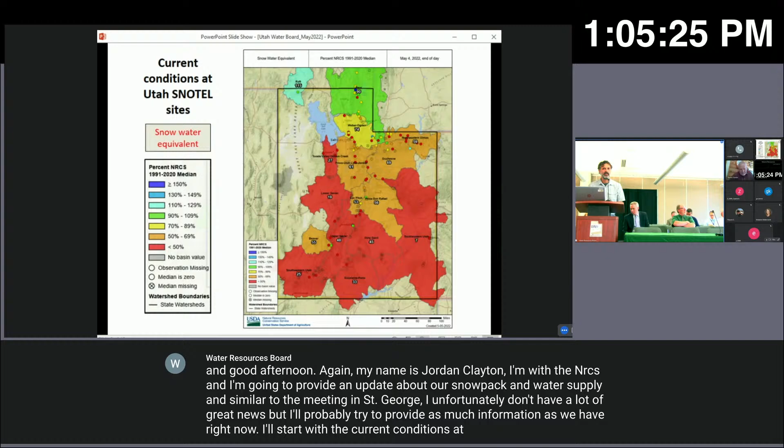I'll start with the current conditions at our SNOTEL sites, our snowpack measurement sites across the state. You can see those shown on this map by the small circles throughout the state. They're colored by what percent of normal they are right now. This was taken this morning. You can also see the major basins across the state and what percent of normal those basins are. With the exception of the Bear Basin in the northern portion of the state, the majority of the state is below normal for this time of year from a snowpack perspective.

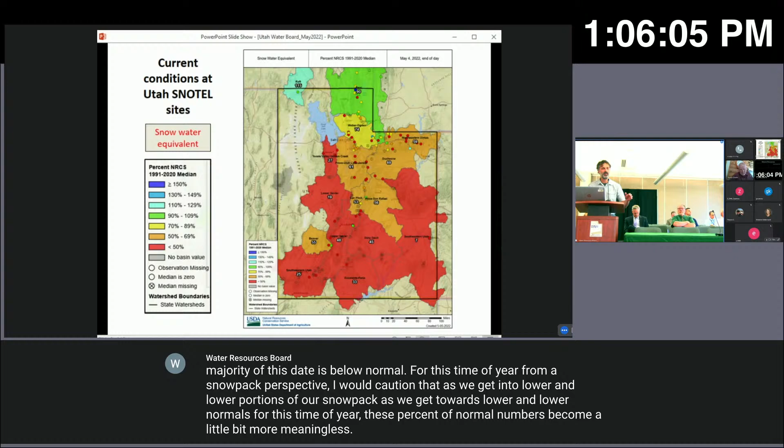I would caution that as we get into lower portions of our snowpack, closer to lower normals for this time of year, these percent of normal numbers become a little more meaningless. When we're comparing against a normal that's close to 1 or 2 inches, the percentages tend to blow up in either direction. So they're not quite as meaningful as a few weeks ago, but I still think they're instructive, so I wanted to include them for today's presentation.

It's trended well below that line since about the second week of January, or late January. Unfortunately, the excellent precipitation we received in October and December, which did boost our precipitation totals, did not lead to the snowpack totals we were hoping for this year, because the precipitation really turned off during January and February.

We've done okay during March and April, a little bit below normal depending on which basin you look at. Some areas, particularly northern Utah, have done a little better — the Bear and the Weber are above normal for April. But from a statewide perspective, we're still unfortunately below normal for our SWE.

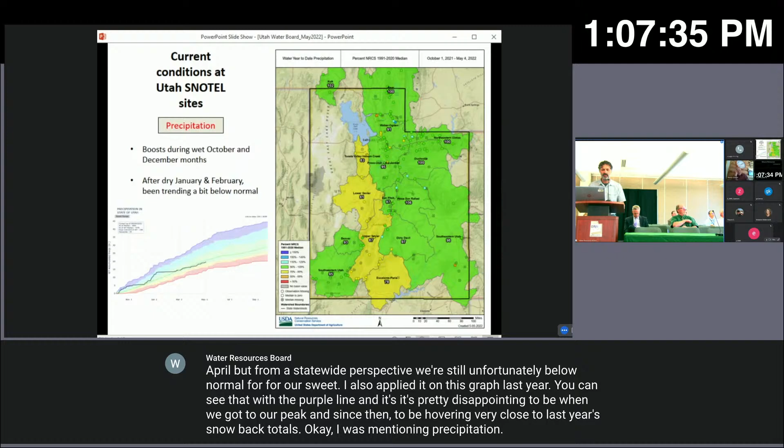Okay, I was mentioning precipitation. These are the major basins again, also shown with the SNOTEL sites, same coloring scheme — a lot more green on this map. We're close to normal for precipitation across the state, with the exception of the southern Wasatch Front and portions of the southern spine of mountains and the westward facing portions of those. But the predominant pattern here is close to normal for the annual water year.

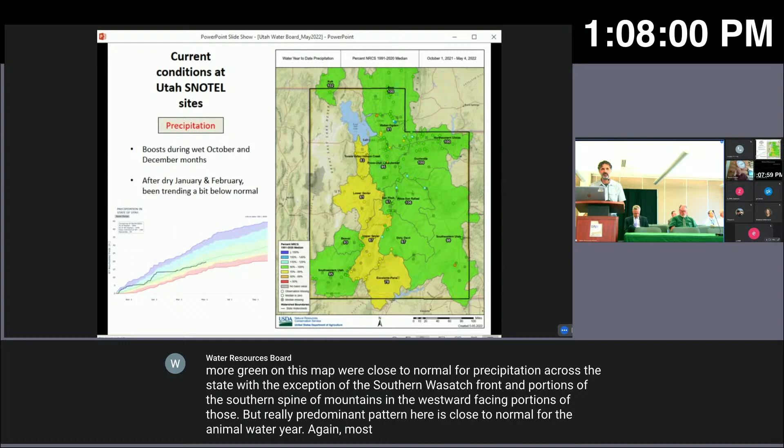Again, most of that comes from the huge boost we had during October and December. We've done pretty well, as I mentioned, in northern Utah over the last month and a half, and that's how the Bear got back up to 100%. But by and large, we're trending a little below normal, as you can see from the graph in the bottom left, showing the current water year.

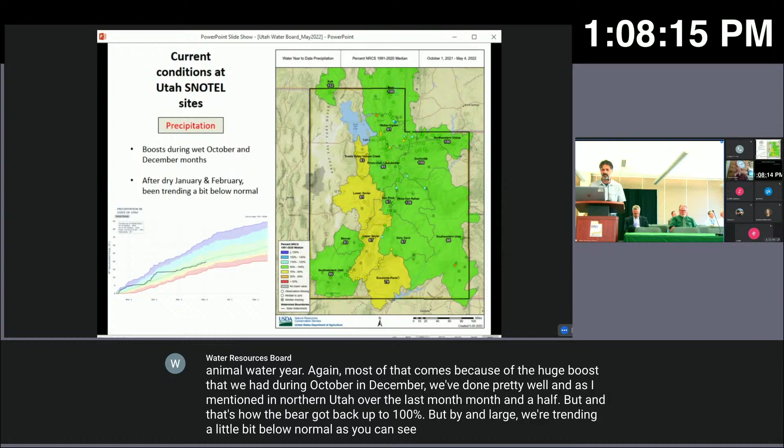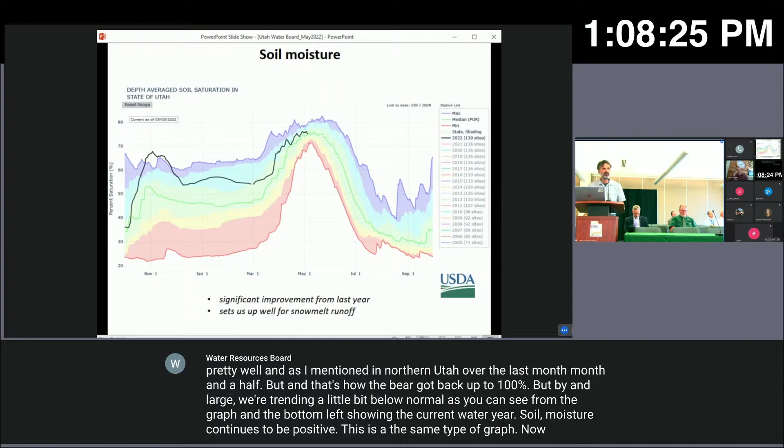Soil moisture continues to be positive. This is the same type of graph, now showing the current water year for soil moisture across the state. This is a depth-averaged value, so it looks at our 2-inch sensor, our 8-inch sensor, and our 20-inch sensor down. It just looks at mountain locations, not our SCAN sites — so this is just our SNOTEL sites.

We're still right about normal, just a little above normal depending on which basin you look at. Some have trended a little below by now, but that's okay — we're feeling pretty good about the soil moisture levels in the mountains, and that's going to promote a better efficiency of our runoff than we experienced last spring.

Last spring, we lost a really large percentage of our snow water to headwater locations, replenishing that sponge, if you will. We're expecting a better return on our snowpack investment this year.

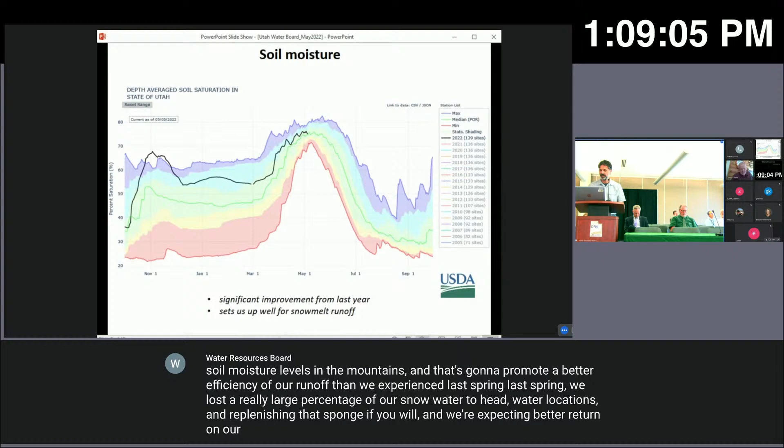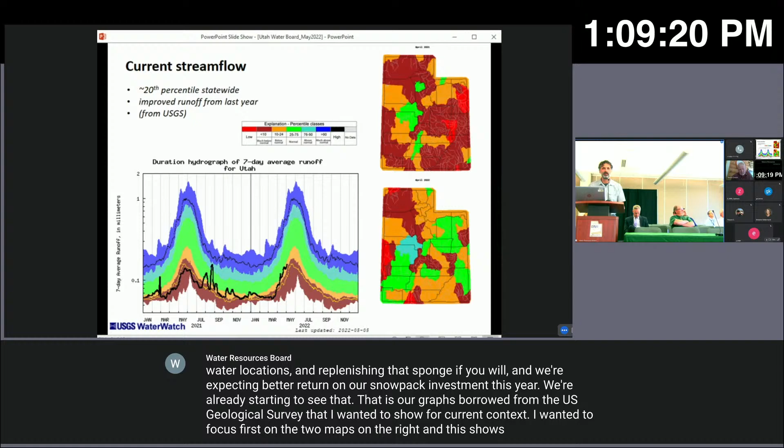We're already starting to see that. These are graphs borrowed from the U.S. Geological Survey that I wanted to show for current context. I wanted to focus first on the two maps on the right. This shows the monthly total stream flow for the basins in Utah for last year on the top right and this year on the bottom right. You can see the improvement across many portions of the state from a stream flow perspective.

We've definitely felt the impacts of that better soil moisture. Even for around the same amount of snowpack, we're seeing it show up in our streams more than we did last year. So I think that's pretty instructive.

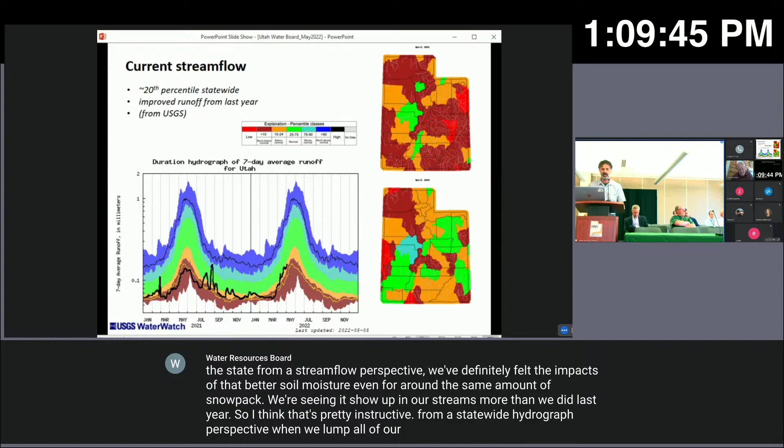From a statewide hydrograph perspective, when we lump all our streams together, that's what we get in the bottom left there. Again, the current water year is shown with the black line, and you can see we're starting to trend into around the 20th percentile. We're still below normal, but not as dire as we were last year at this time. If you move your eye to the left portion of that graph, you can see last year, at the beginning of May, we were solidly in the bottom 10th percentile.

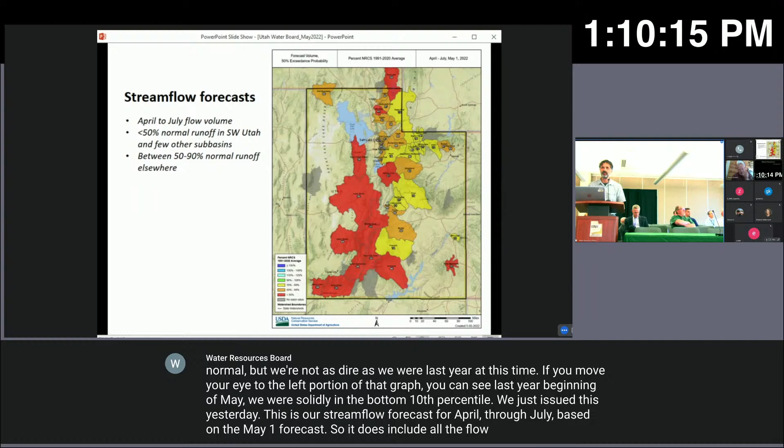We just issued this yesterday. This is our Streamflow forecast for April through July based on the May 1 forecast. It includes all the flow we've already received for the month of April, and it forecasts forward the total volume we'll receive from the beginning of April to the end of July as a volume.

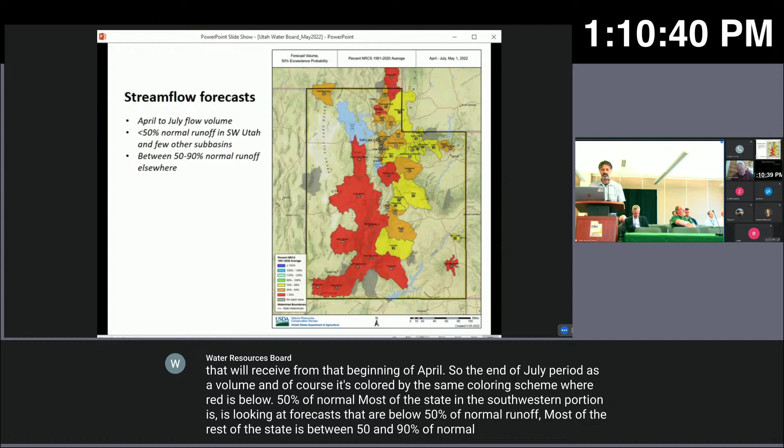It's colored by the same coloring scheme where red is below 50% of normal. Most of the state in the southwestern portion is looking at forecasts below 50% of normal runoff. Most of the rest of the state is between 50 and 90% of normal runoff anticipated at this point. I'd mention our partners at the Colorado Basin River Forecast Center have a similar forecasting regime, and their predictions are pretty close to these.

I don't want to speak for that agency per se, but I do want to mention that we reach out to the CBRFC when we are working on these forecasts, and it sounds like there's pretty good alignment between that agency and ours for this month.

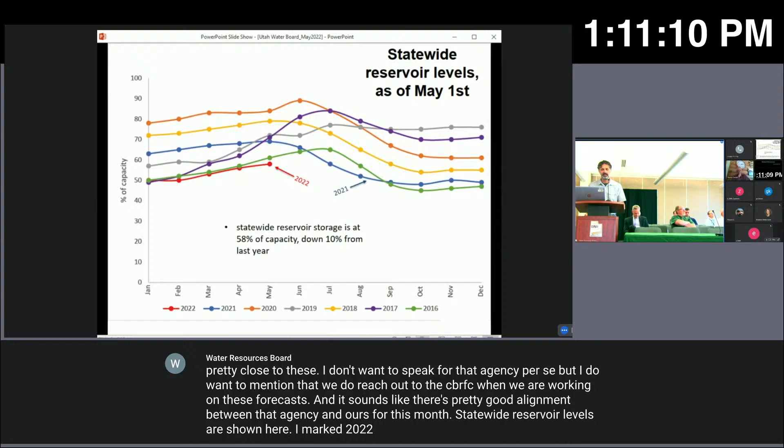Statewide reservoir levels are shown here. I marked 2022 with the red line - I just plotted this before coming over. We've got 58% of capacity right now in our reservoir system, that's down 10% from this time last year.

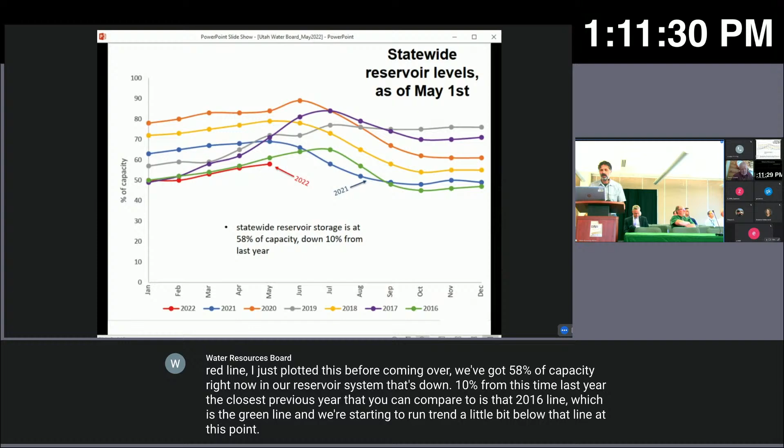The closest previous year we can compare to is that 2016 line, the green line, and we're starting to trend a little bit below that line at this point. But by comparison, that's the closest one we can think of from a management perspective. 2021 is shown by the blue line - you can see we're well below where we were last year from a reservoir perspective.

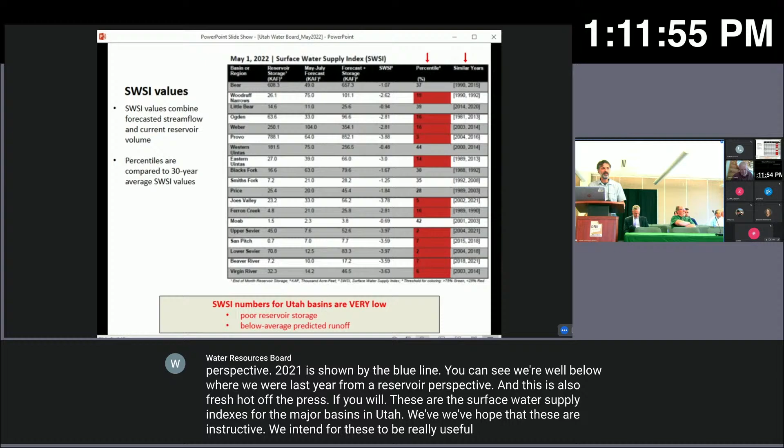This is also fresh, hot off the press. These are the surface water supply indexes for the major basins in Utah. We hope these are instructive. We intend for these to be a really useful measure of how much water is going to be available for those summer months. This combines the volume of water we're anticipating for those major basins with what's currently in those reservoir systems, and then we compare it to the previous 30 to 40 years for those basins to get an index.

Where the index is in the bottom 20th percentile, it shows as red. You can see there's a really large number of basins in the state that are in the red category - several are very, very low. The Provo and the upper Sevier are both at the second percentile. Also Joe's Valley, and several others in the state are very low at this point - upper Sevier and lower Sevier, I should mention.

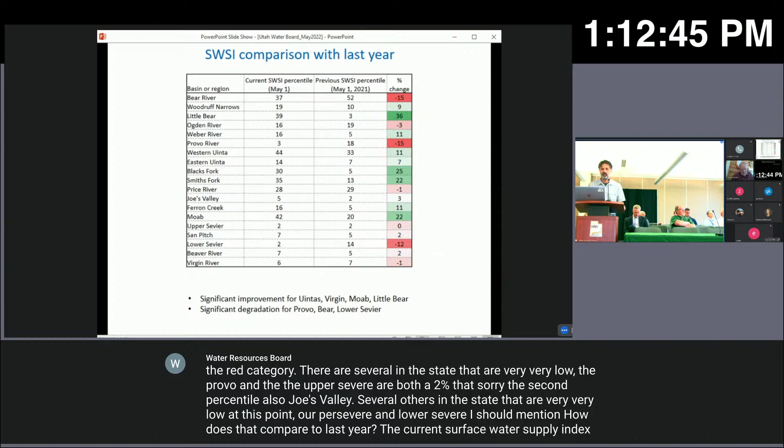How does that compare to last year? The current surface water supply index percentiles are shown on the left side of this chart. For May 1st last year, the SWSIs are shown on the right side, and the relative change is the final column. Areas of the state that were improving - we've seen some improvement - are the Uintas, the Virgin, Moab area, and the Little Bear, which have all significantly improved from last year, and that's positive.

I like to try to highlight anything positive that I can say at this point. Unfortunately, the Bear, the Provo, and the lower Sevier are significantly degraded from last year from a surface water supply index perspective.

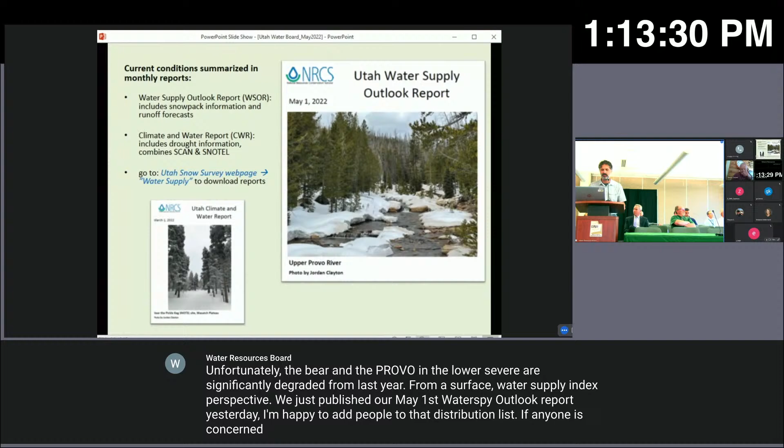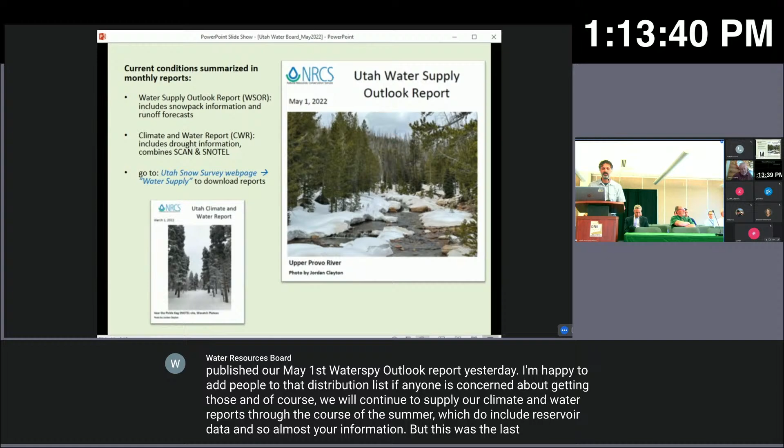We just published our May 1st water supply outlook report yesterday. I'm happy to add people to that distribution list if anyone is concerned about getting those. We'll continue to supply our climate and water reports through the course of the summer, which include reservoir data and soil moisture information. But this was the last water supply outlook report of the water year - we'll continue to report on those next January. Those are all the comments that I have, and happy to take questions.

There was one public comment online. I know we'd want to make note for the record that there was one public comment received online. Randy, do you want to address that, please? Thank you, Jordan. Yeah, you're fine.

We received a comment from Ann Tanner, and her comment reads: with the governor's recent declaration of emergency due to severe drought, what measures are in place to ensure appropriate budgeting of water for new housing developments? For example, if a developer buys four single-family home lots and plans to tear those houses down and build a 24-unit apartment building, does the developer need to purchase water rights for the additional water used by the increased number of people living in the new space? If not, why not?

How is the doctrine of prior appropriation being carried out when it comes to new developments in the state? If we run out of water, will water be turned off to new developments first, before it's turned off for residents with earlier priority dates to the water? Or how does the doctrine of prior appropriation work regarding new housing developments? I want to thank you for your time and work in helping ensure the water resources in the state are properly looked after and safeguarded.

The project needs funds at this time in order to complete the engineering and make down payments on the control gates for the spillway. It's anticipated that the project will be bid in either the end of June or the first part of July.

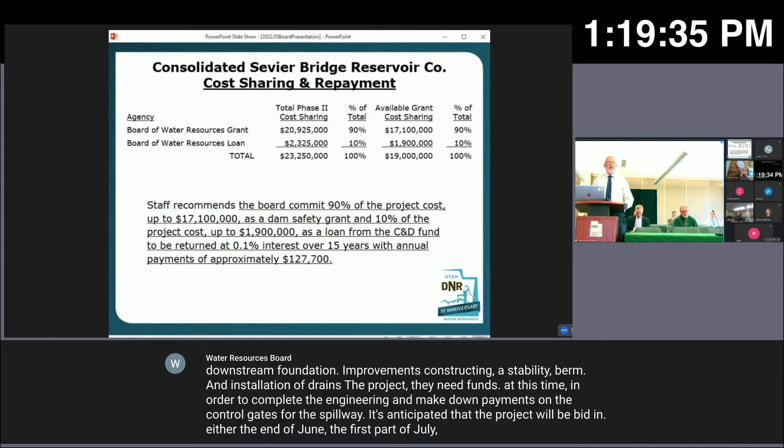We have up before you right now the total project estimated cost, which is out of date—we just got it updated yesterday. It's now about a $27.25 million project, so that's up about $4 million from the figures in the report. Currently, the board has only $17.1 million available in dam safety grant money. So that's what will be recommended to the board to commit today.

If you look at the updated cost estimate of $27.25 million and the normal 90% grant cost sharing and 10% loan cost sharing to pay for an upgrade project, we're looking at 24.5 million or so of grant money that will be available for the project.

That is not available right now, but because the applicant needs the funds to continue with the project, we're recommending the board commit $17.1 million in dam safety grant. That's 90% of the project cost, and also up to $1.9 million, that's 10% of the project cost in grant money from the C&D fund, or loan money from the C&D fund.

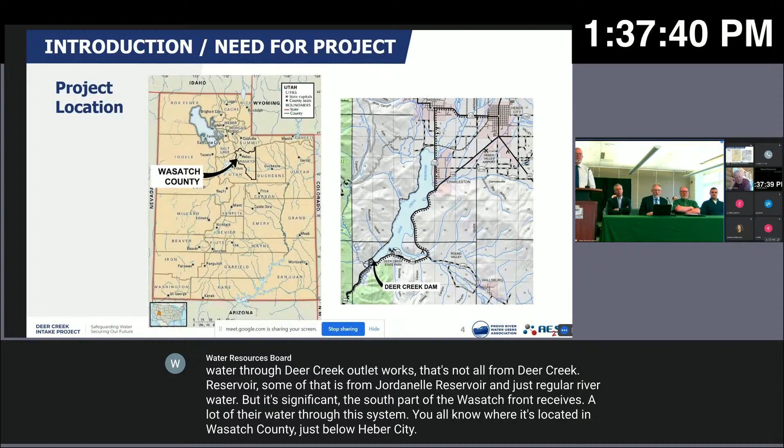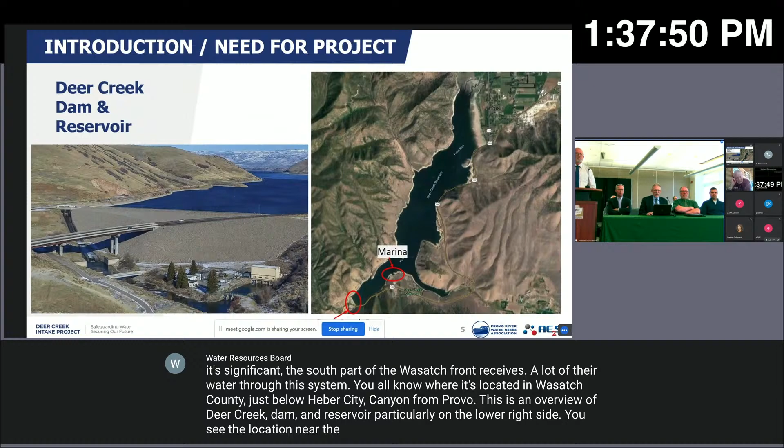This is an overview of Deer Creek Dam and Reservoir. Particularly on the lower right side, you see the location near the dam and the marina. We'll talk later about the impacts to those areas.

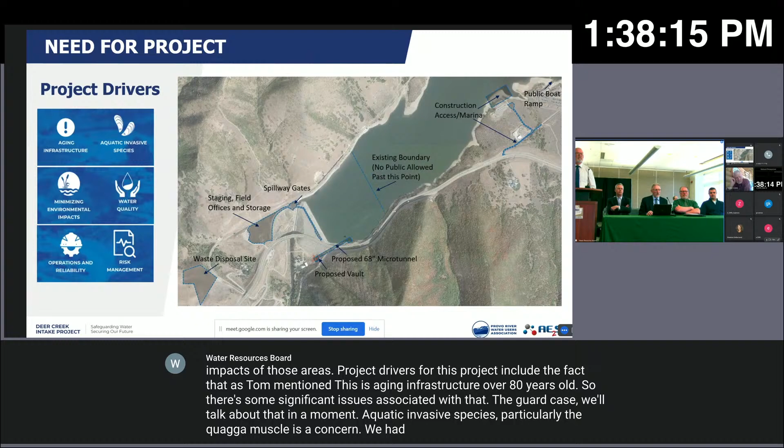Project drivers for this project include the fact that this is aging infrastructure, over 80 years old, with significant issues associated with that. The guard gates—we'll talk about that in a moment. Aquatic invasive species, particularly the quagga mussel, is a concern. We had a scare a number of years ago, so the design takes that into account, and this will mitigate and address that. We also wanted to mitigate and minimize environmental impacts associated with this project.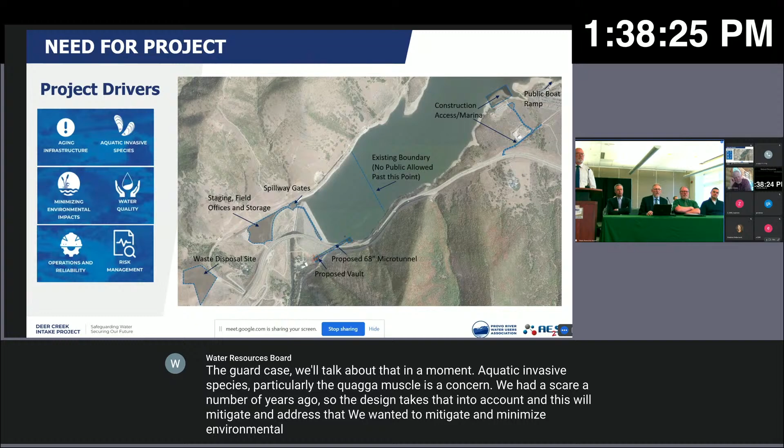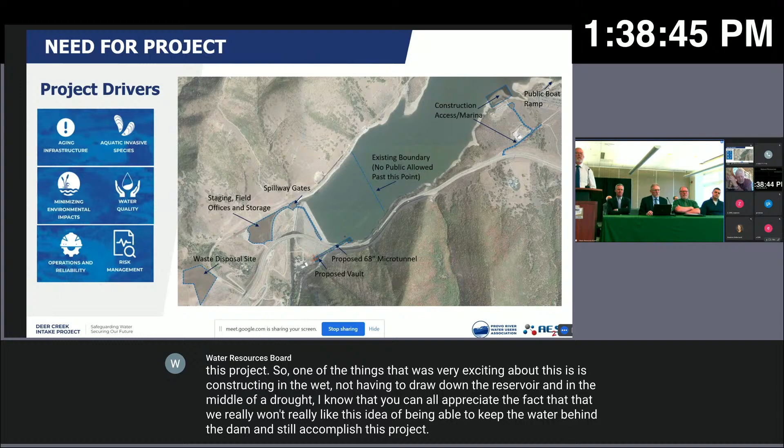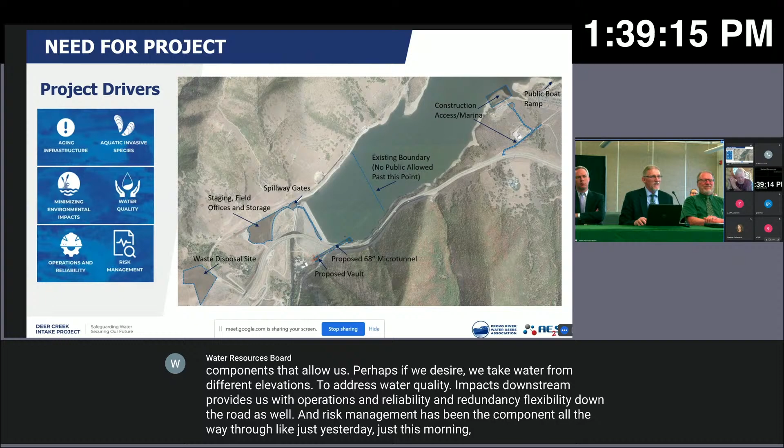One of the exciting things about this is constructing in the wet, not having to draw down the reservoir. In the middle of a drought, we really like being able to keep the water behind the dam and still accomplish this project. It will help with water quality, both during construction and down the road, because the design allows us to take water from different elevations to address downstream water quality impacts. It also provides operations reliability, redundancy, and flexibility down the road. Risk management has been a component throughout—in fact, just this morning we completed a risk workshop on this project with the Bureau of Reclamation.

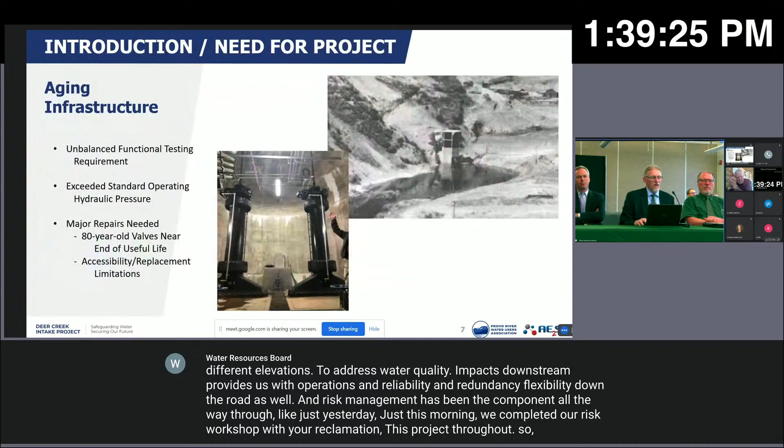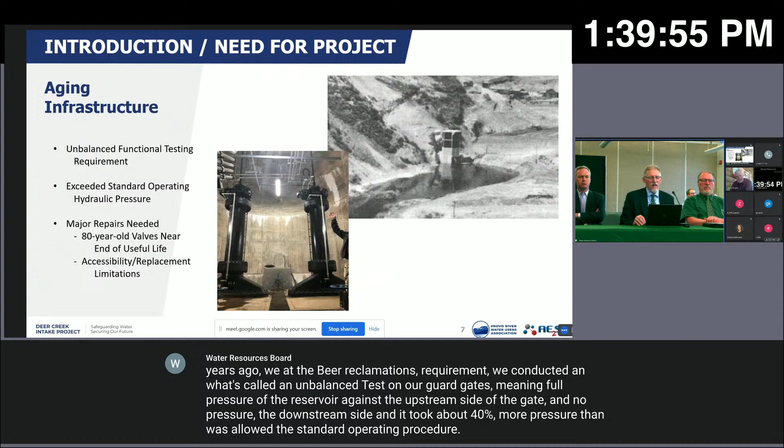So we talked about aging infrastructure. I wanted to give you insight into what we're looking at. About 7 years ago, at the Bureau of Reclamation's requirement, we conducted what's called an unbalanced test on our guard gates, meaning full pressure of the reservoir against the upstream side of the gate and no pressure on the downstream side. It took about 40% more pressure than was allowed under standard operating procedure to move these gates. That was a very big concern to us, thinking, these are 80-year-old gates—what happens if they don't perform?

What happens if they get stuck closed or stuck open? Either way, it's a bad day for us. So that kind of drove this project, as we realized we needed to do something. The problem was, as you can see in the upper right corner, the old intake before the reservoir was full—there's no way to isolate the intake. It doesn't have stop logs or a bulkhead or anything of that nature, no valve at that end. So it took a lot of thought on how we might address this issue.

Some of the things that we did through this, we did some bathymetry to understand what's below the surface, what it all looked like as we're getting ready for construction. I had a really cool video, but I wanted to conserve time, so I won't show it.

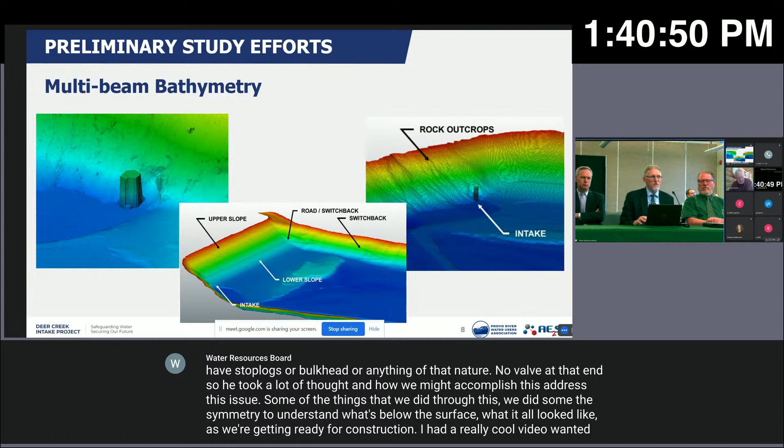We also did some geotechnical assessment, did a lot of drilling and boring to determine what the bedrock was under the reservoir, particularly around the intake structure itself. The initial design was to actually construct a new intake structure, a 140-foot tall intake structure.

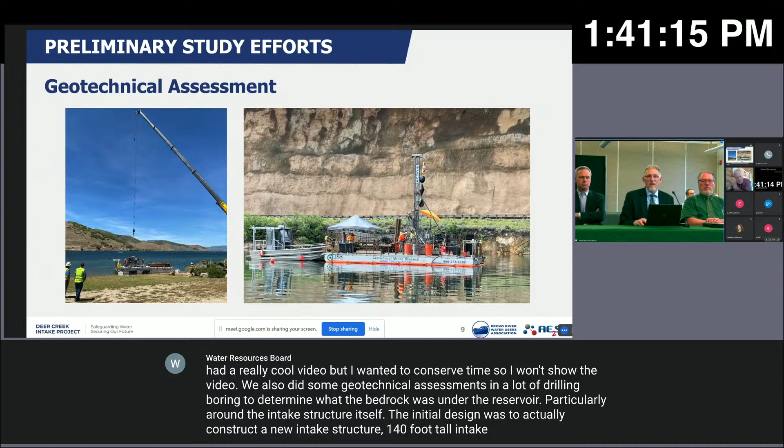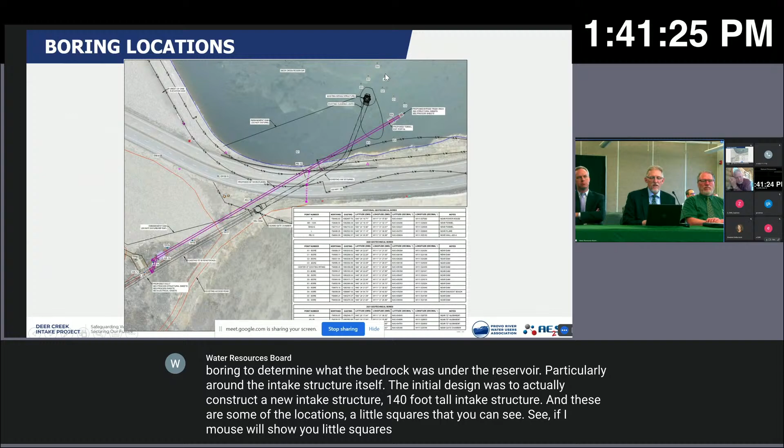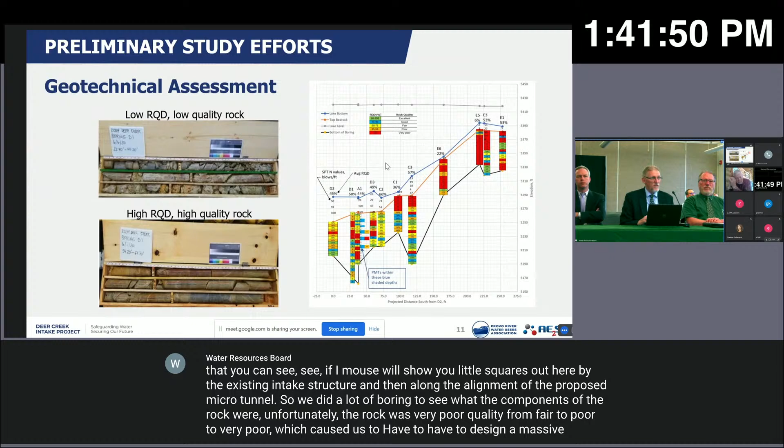These are some of the locations, the little squares you can see out here by the existing intake structure, and then along the alignment of the proposed microtunnel. We did a lot of boring to see what the components of the rock were. Unfortunately, the rock was very poor quality, from fair to poor to very poor, which caused us to have to design a massive foundation to accommodate that.

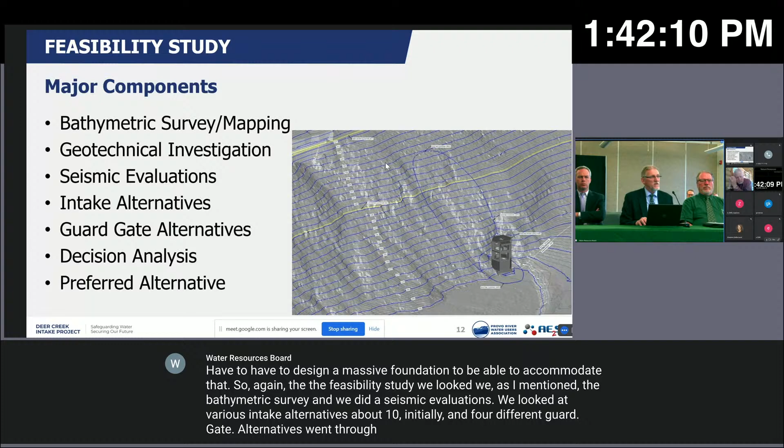So again, the feasibility study, as I mentioned, included the bathymetric survey, and we did seismic evaluations. We looked at various intake alternatives, about 10 initially, and 4 different guard gate alternatives.

Went through a pretty rigorous decision analysis before we came up with the preferred alternative. I'll briefly go through these initial alternatives. The first 3 were all 140-foot tall structures with very massive foundations to accommodate the poor rock quality. They were a concrete structure, a stainless steel structure, and a carbon steel structure, all breaking the surface of the reservoir.

Then there was alternative 4, this inclined intake, which we looked at as well. We looked at 3 others, shorter versions of the earlier ones: steel, two different steel options, and a concrete option.

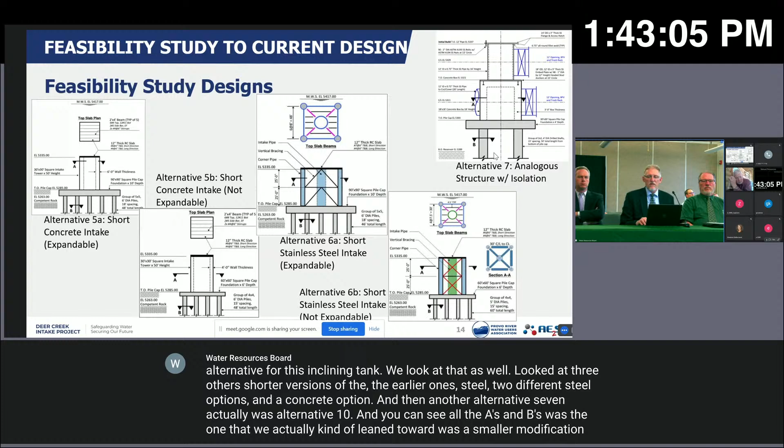Then another alternative, actually alternative 10 when you consider all the A's and B's, was the one we leaned toward: a smaller modification of the existing intake structure with some flexibility for the future. And for the guard gate options, we looked at 4 different options there.

Two of them were rehabilitation of the existing guard gates with some isolation. One was isolation of the 144-inch, or 12-foot, intake tunnel, and the other was isolation of the penstock, which is a very dangerous dive, called a penetration dive, that cost a lot of money, so not very favorable. The other 2 options were new valves, either upstream or downstream of the guard gates. Those also were going to be a challenge, but we did look at all of them.

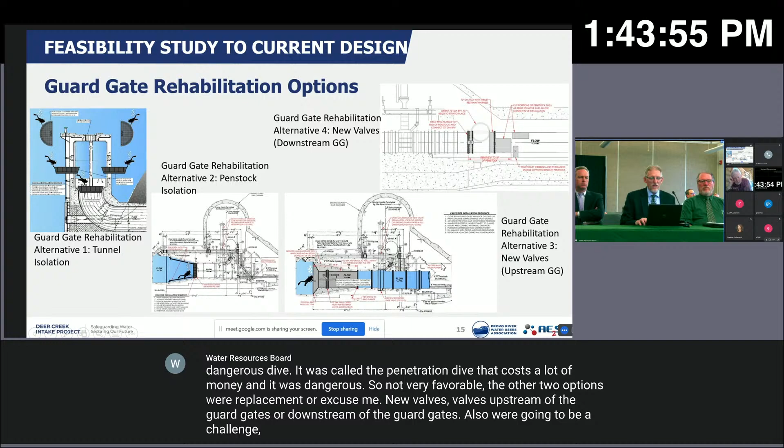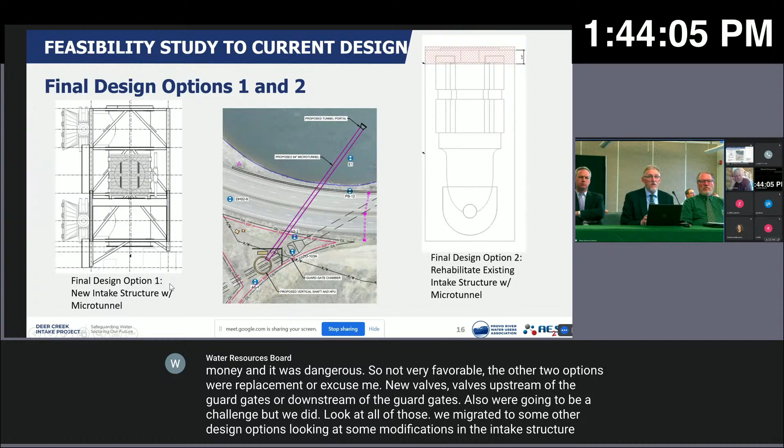We migrated to some other design options, looking at modifications to the intake structure and adding the microtunnel that Tom mentioned. Initially, when we talked about adding a microtunnel, it was a shorter tunnel, I think 300 or 400 feet. It had a 140-foot vertical shaft as part of it that would enable water to come in from the reservoir, drop down, and intercept the existing intake penstocks, right here in this dashed area. That was the concept behind both of these intake structure modifications.

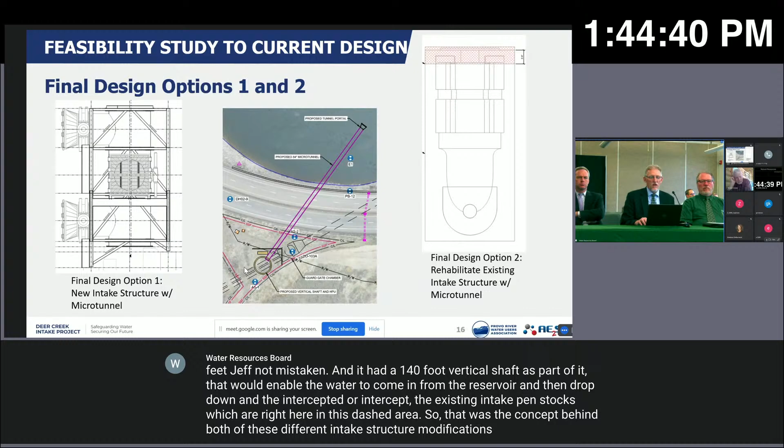We've since modified that slightly to get to where we currently are. Our current design really involves not much modification at all to the existing intake, which is good. It's simply cutting a beam of the existing intake in the reservoir right here, and inserting a bulkhead that would give us isolation of the existing 12-foot diameter tunnel, allowing us to work on the guard gates.

Now, in order to keep water flowing, there are two options we could do. We could do bypass pumping. Our engineers and our contractor looked at that, and we determined the cost would be around $15 to $20 million just to bypass pump for the time period needed. We didn't like that idea, and our board didn't like it either. We felt that was throwing money away, because at the end of construction, you've spent $15 or $20 million and really don't have anything. So our designers looked at another option: what if we put in this microtunnel?

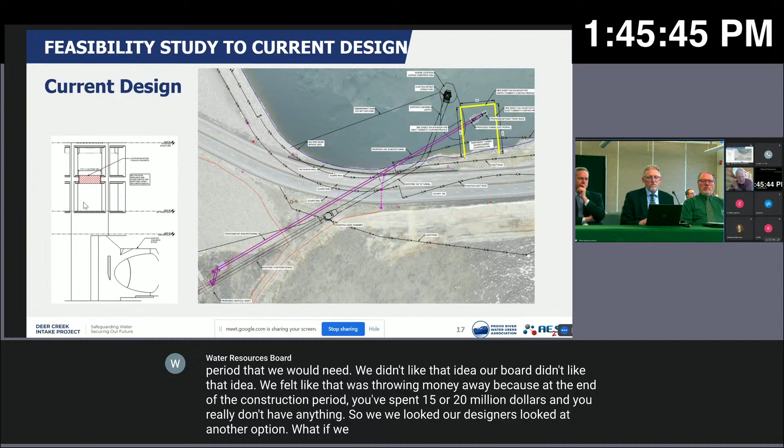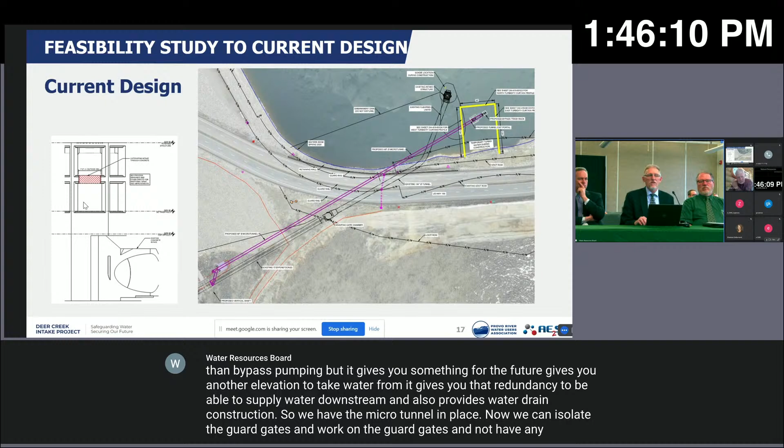It's going to cost more than bypass pumping, but it gives you something for the future. It gives you another elevation to take water from, and that redundancy to supply water downstream. It also provides water during construction. Once the microtunnel is in place, we can isolate the guard gates and work on them without impacting deliveries downstream. That's where we landed.

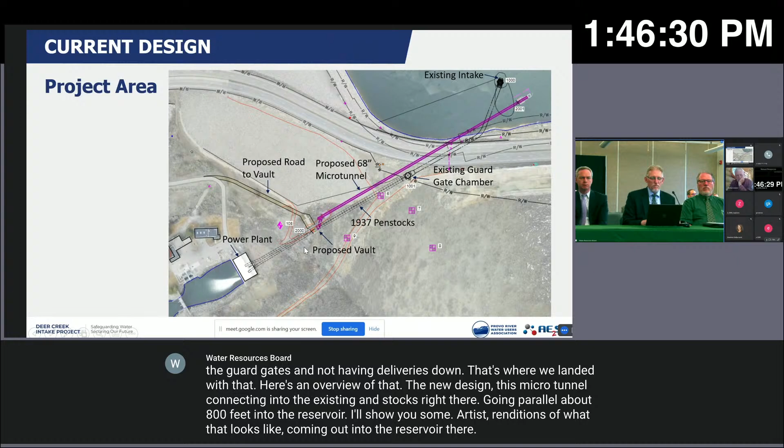Here's an overview of the new design. It's this micro tunnel connecting into the existing penstocks, going parallel about 800 feet into the reservoir. I'll show you some artist renditions of what that looks like coming out into the reservoir in just a moment.

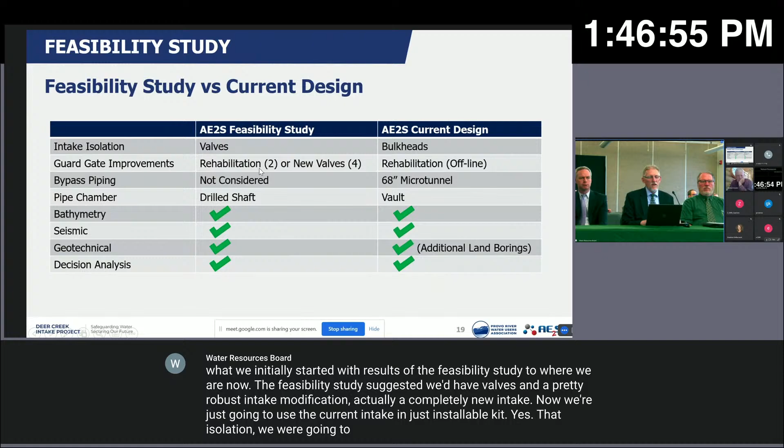Compared to what we initially started with in the feasibility study, the study suggested we'd have valves and a pretty robust intake modification, actually a completely new intake. Now we're just going to use the current intake and install a bulkhead for isolation. We were going to look at rehabilitation or new valves for the guard gate improvements; now it's going to be rehabilitation in the guard gate chamber. We didn't look at bypass piping or a micro tunnel initially, but now, as mentioned, a 68-inch micro tunnel, 800 feet long. We had a 140-foot deep shaft initially; now that's down to about a 72-foot vault, a lot easier to construct and more workable for us.

All of this was informed by the bathymetry we did, the seismic investigation, the geotechnical borings, and a robust decision analysis called the Kepner-Tregoe analysis. We identified areas to focus on: reliability, redundancy, cost, risk management, equipment flexibility, access and maintenance, future expandability, quagga mussel issues, water quality issues, and longevity, and assigned them different weights. We went through this exercise as staff, involving our board of directors as well as our engineer, and we all came to the same decision.

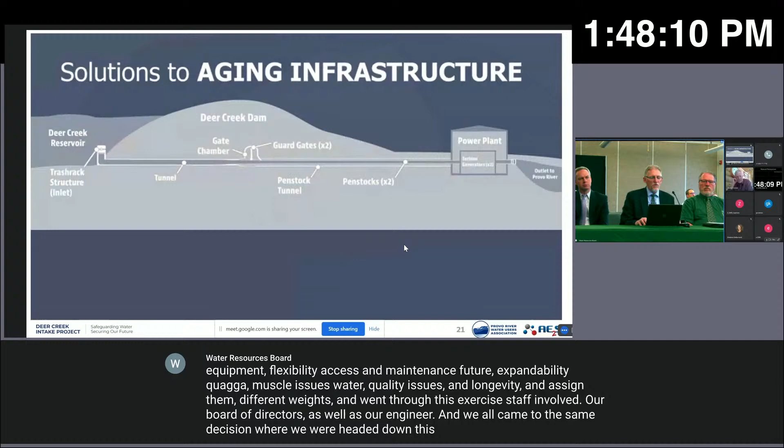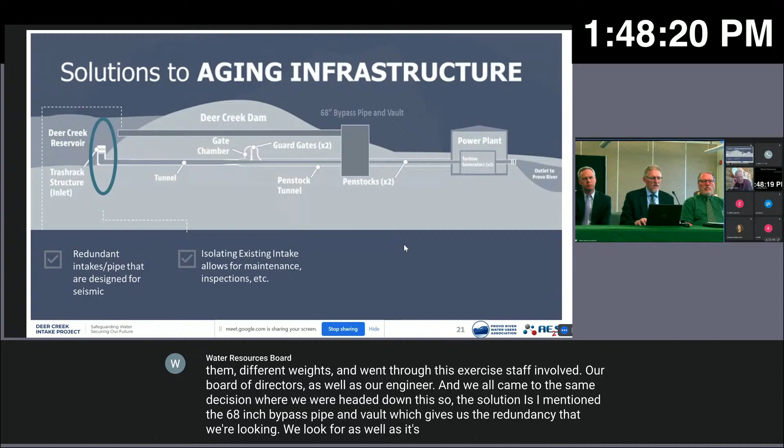So the solution is the 68-inch bypass pipe and vault, which gives us the redundancy we look for, as well as being designed for seismic. We'll be able to isolate the existing intake, which allows us to do the rehabilitation of the guard gates and address that aging infrastructure issue.

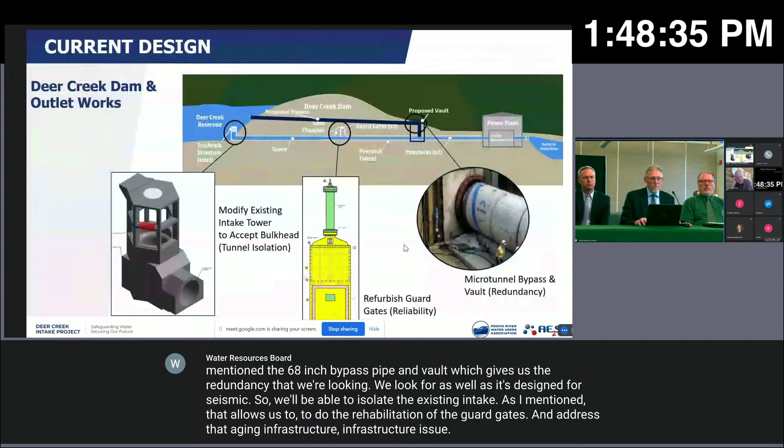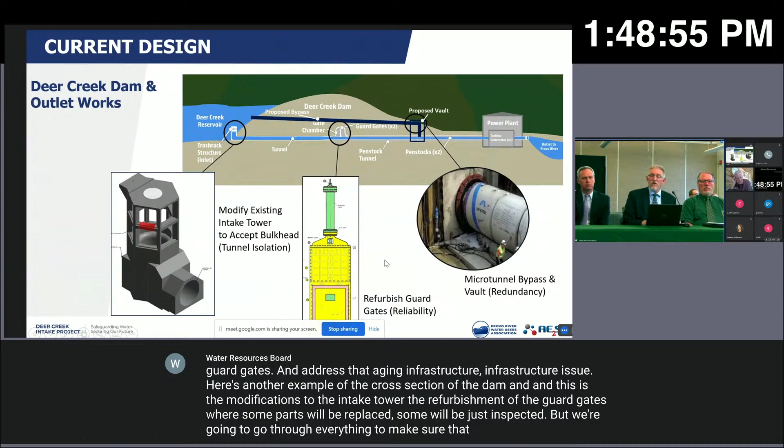Here's another example of the cross section of the dam, showing the modifications to the intake tower and the refurbishment of the guard gates, where some parts will be replaced and some just inspected. We're going to go through everything to make sure it's ready for another 80 or 100 years, along with this micro tunnel and vault.

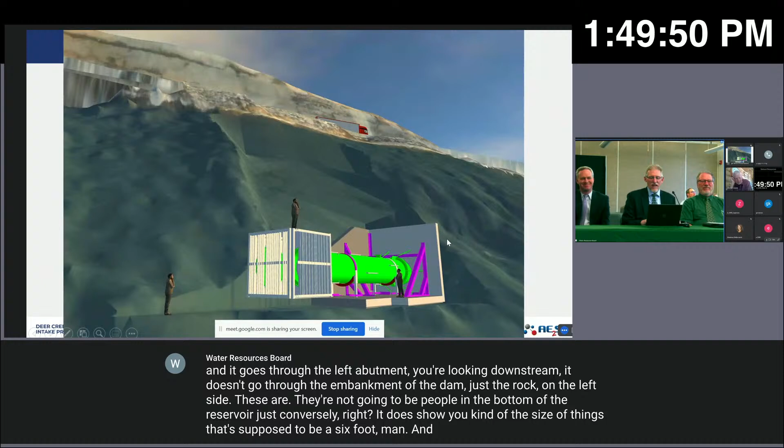There aren't going to be people at the bottom of the reservoir conversing, but it does show you the scale of things—that's supposed to be a 6-foot man—and it shows how it comes out of the mountainside. We have a trash rack there to prevent anything from going into the pipeline.

And again, this is all coated with what's called foul release coating to address concerns about quagga mussels. Currently there are no quagga mussels in Deer Creek Reservoir, knock on wood, but there was some concern a number of years ago, so we want to be prepared if that happens.

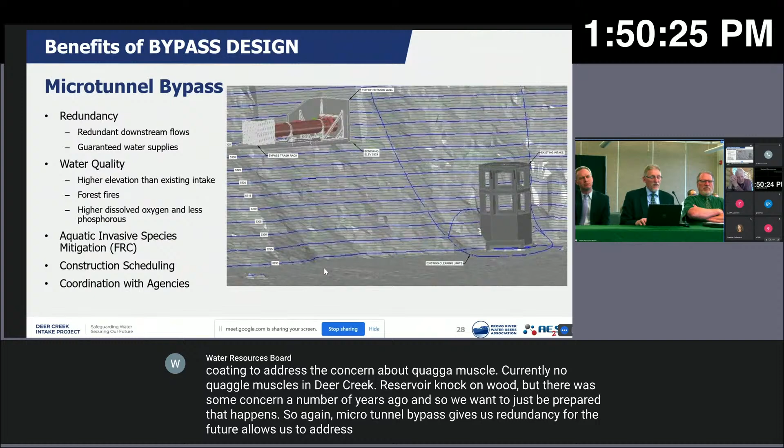So again, the microtunnel bypass gives us redundancy for the future and lets us address water quality issues if needed. We've talked about aquatic invasive species and scheduling, and we've been coordinating with just about every agency we can think of—Deer Creek State Park, the Division of Wildlife, Division of Water Resources, the Fish and Wildlife Service at the federal level, and we're intimately working with the Bureau of Reclamation on this project. We've tried to be inclusive in that regard.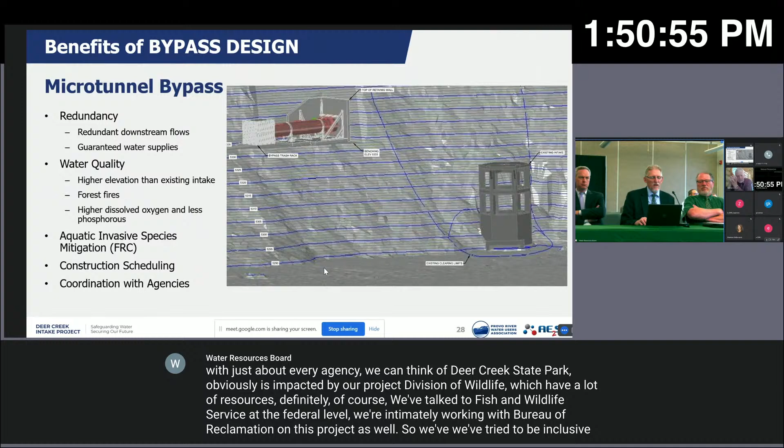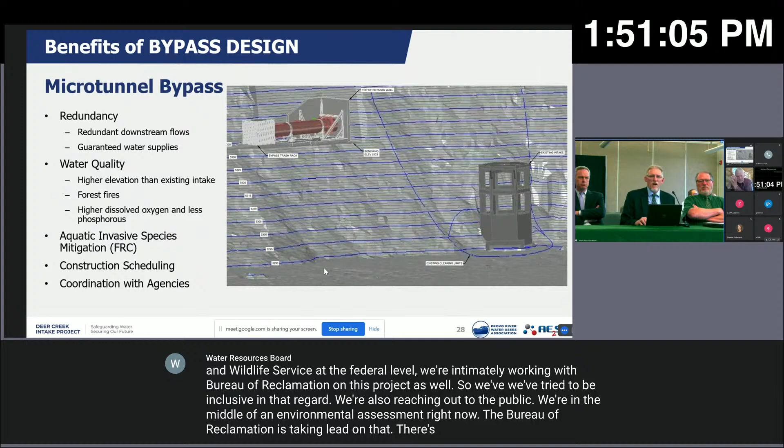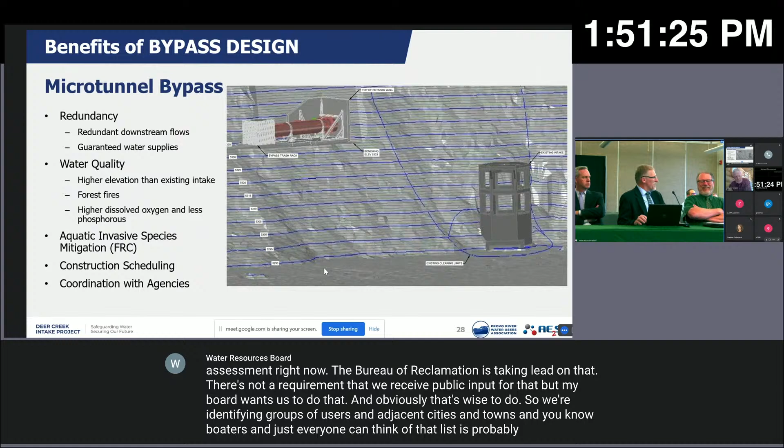We're also reaching out to the public. We're in the middle of an environmental assessment right now, which the Bureau of Reclamation is leading. There's no requirement that we receive public input for that, but my board wants us to do it, and obviously that's wise. So we're identifying groups of users, adjacent cities and towns, boaters, and everyone we can think of—the list is probably 50 different entities we're looking to include.

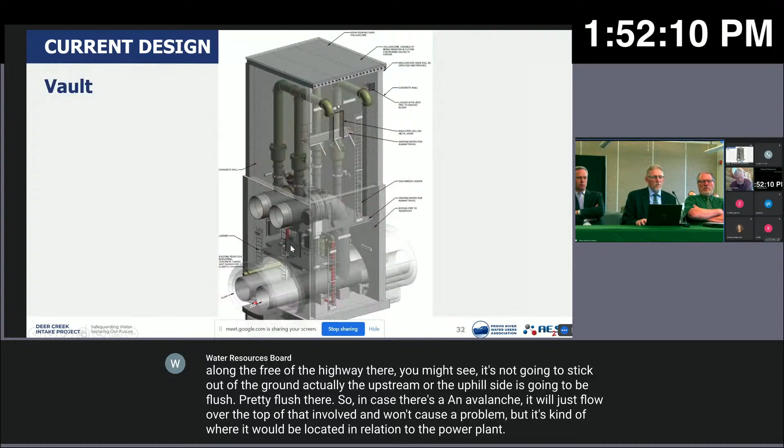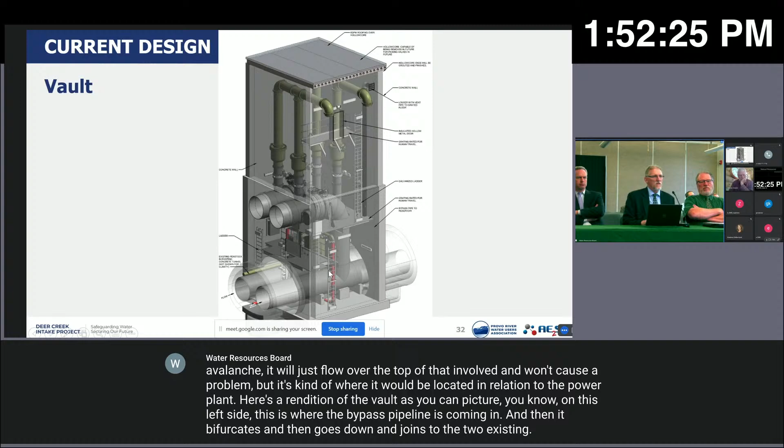Here's a rendition of the vault. On this left side, the bypass pipeline is coming in, and then it bifurcates and goes down to join the two existing penstocks. This vault will have access at the top for maintenance and our technicians. There will also be a removable roof, so that in the future, if we need to take out a big component such as a valve, we can do that without destroying anything or going out through the penstock tunnel, which would not be good.

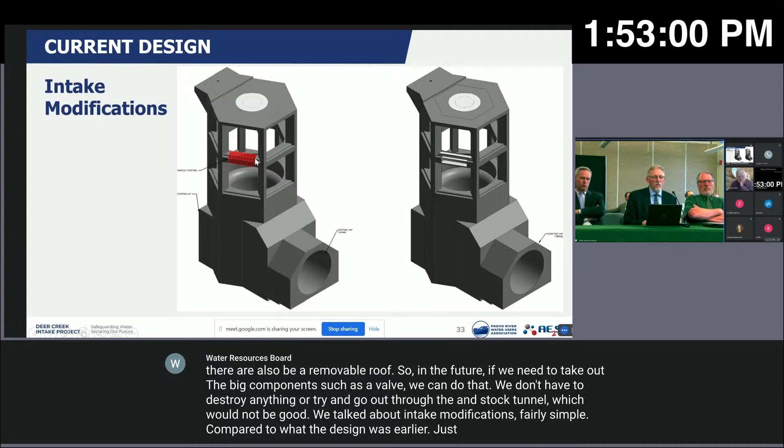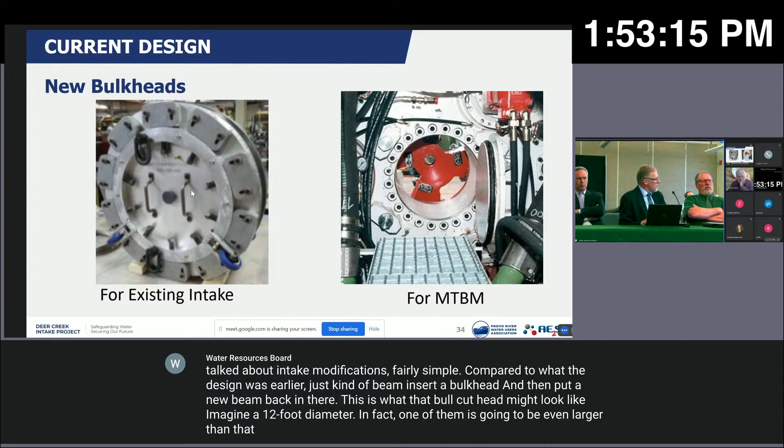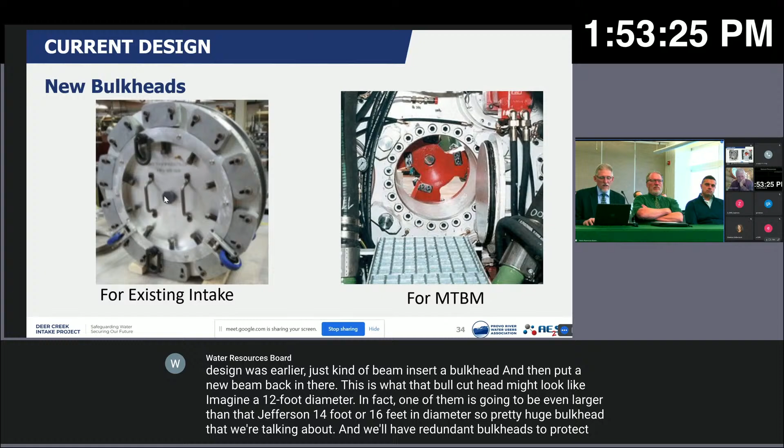We talked about intake modifications, fairly simple compared to the earlier design. Just cut a beam, insert a bulkhead, and then put a new beam back in. This is what that bulkhead might look like—imagine 12 feet in diameter. In fact, one of them is going to be even larger, 14 or 16 feet in diameter, so a pretty huge bulkhead. We'll have redundant bulkheads to protect personnel working, so safety is obviously an issue.

All this work done in the wet will be from barges. You'll see barges on Deer Creek Reservoir for months at a time. We're going to have turbidity curtains involved to protect water quality. The majority of the water that Provo River Water Users Association delivers goes for water treatment for drinking water, so our users are very concerned about that, and we will definitely maintain water quality.

Our delivery team—AE2S is our design engineer. We are operating with a CMGC, construction manager general contractor arrangement with Granite Construction. It's been great to have them on board through this design effort. And as I mentioned, we work very closely with the Bureau of Reclamation, because this is a Bureau of Reclamation team.

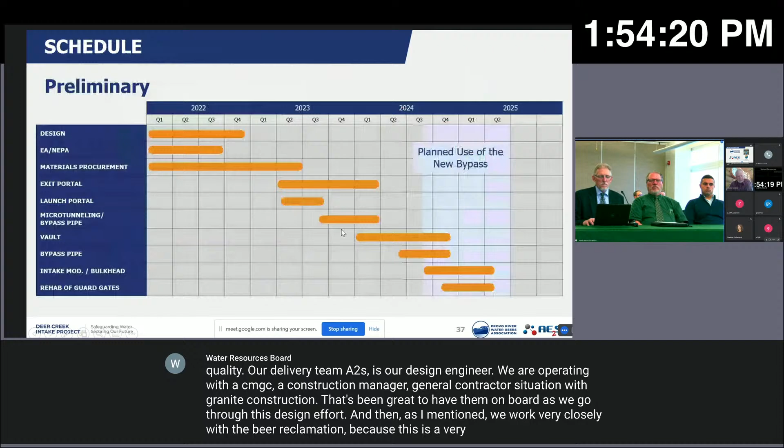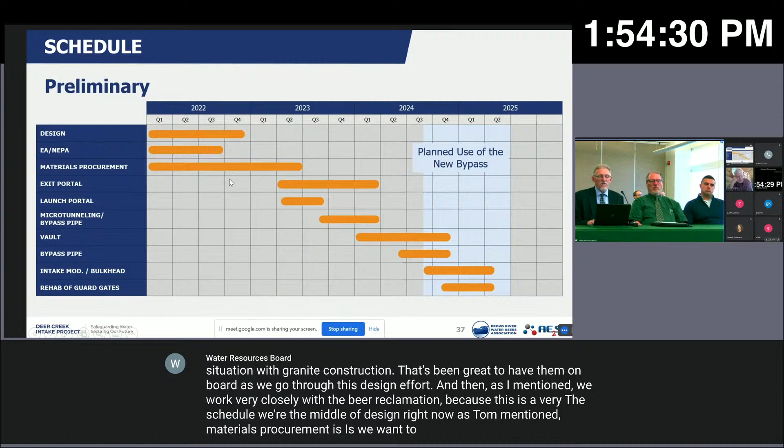The schedule—we're in the middle of design right now. As Tom mentioned, we want to start materials procurement fairly soon, and we need funding to do that. We keep watching the price of materials go up every day, and I echo what Randy said about fuel. From our 30% cost estimate to our 60% cost estimate, probably the majority of the increase was due to fuel costs, according to our contractor. This schedule shows we'll complete the project in the second quarter of 2025 if all goes as planned.

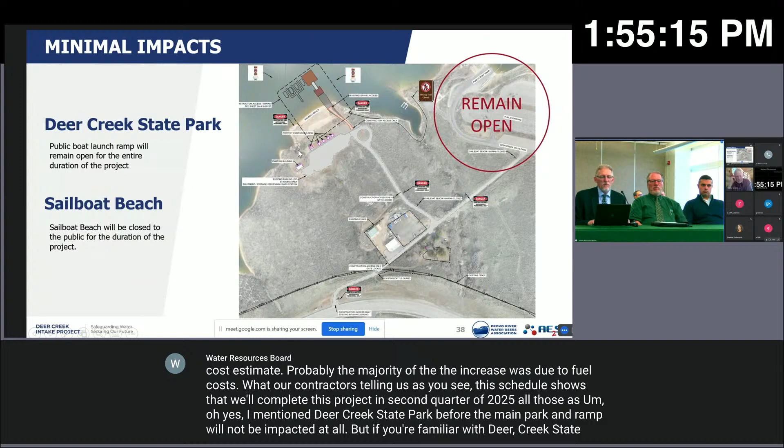I mentioned Deer Creek State Park before. The main park and ramp will not be impacted at all, but if you're familiar with Deer Creek State Park, there's a sailboat beach—not an improved ramp, but a dirt ramp. Our contractor will take that over for the 3 years of this project, so there will be no public access there. We will put it back in better than it was before we started, and we're coordinating with Deer Creek State Park on that.

And about the funding—Tom mentioned we're looking at other options, possible reclamation grants, other state agencies, and everything we can think of. If you have an idea, we'll gladly hear it. As he showed you, there's an $11 million gap between what we've identified and what we need. Just to mention on costs, the $100 million is our projection based on the cost estimates we received at 60%, and what our engineer, designer, and contractor expect to see at 100%.

So we're trying to be proactive and coming to you saying that we expect it to be $100 million, but while we're going through this process, we are still trying to identify cost savings measures along the way, and we will continue to do that. So as we watch inflation and cost of materials impact us, we're still trying not to cut corners, but just be more efficient in what we're doing so that we have the best value.

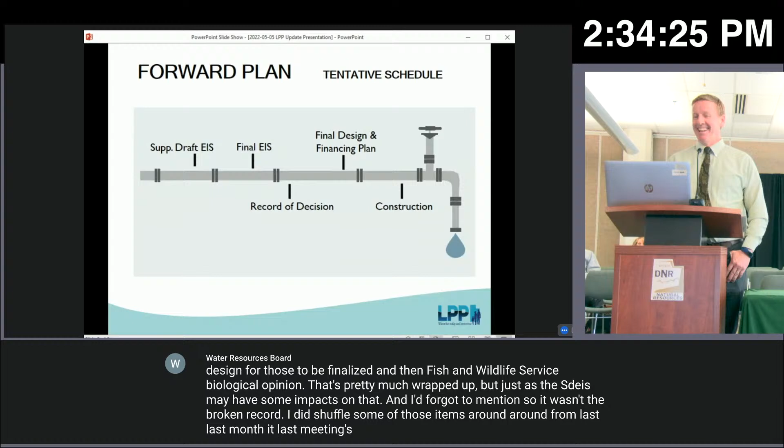For forward planning, no dates have been set, because with the focus on the drought, there's not been a date set for when the SDEIS will be anticipated to be completed. But there's a timeline of what will happen: SDEIS, then the final, which will lead to a record of decision. Then we'll get into design and financing issues, and finally into construction.

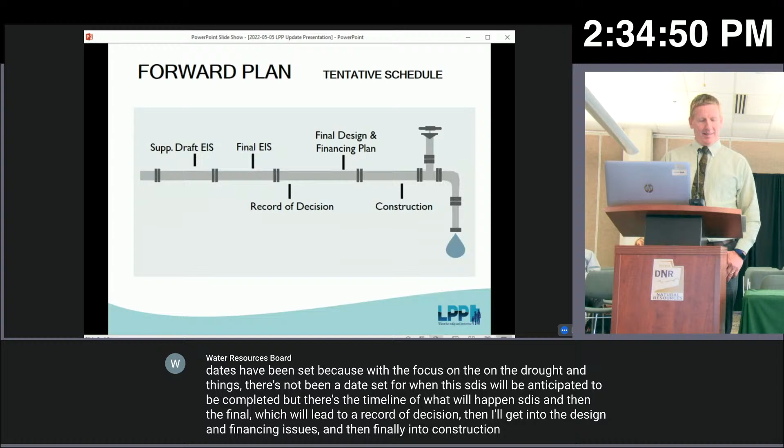As far as contracts, the consultant we have working with us, Stantec, that contract is good through the end of this year with the funds provided by the most recent amendment. A silver lining of things slowing down is that the contract has been spent a little slower than expected, so it'll get stretched out a little further. The Bureau of Reclamation task order and the BLM cost recovery agreement, nothing is needed at this time for either of those. The funds are there when they need them.

And that's all I had to present right now, unless there are any questions. Thank you, Eric. Any questions from the board?

This is Norman. What is the code section under which this operates for the state of Utah? It's the LPP Act. Do you remember the exact section? I don't know off the top of my head. We can track it down and email it out to you.

Chairman, this is Randy. One of the things in that act is that the board is supposed to have direct oversight on this, so the more information we receive, the better. Good point, thank you for bringing that back to our attention. Eric, part of your objective is to keep us informed. So as these meetings get closer, if there's anything you want me to focus on or highlight, just let me know and I'd be happy to do so.